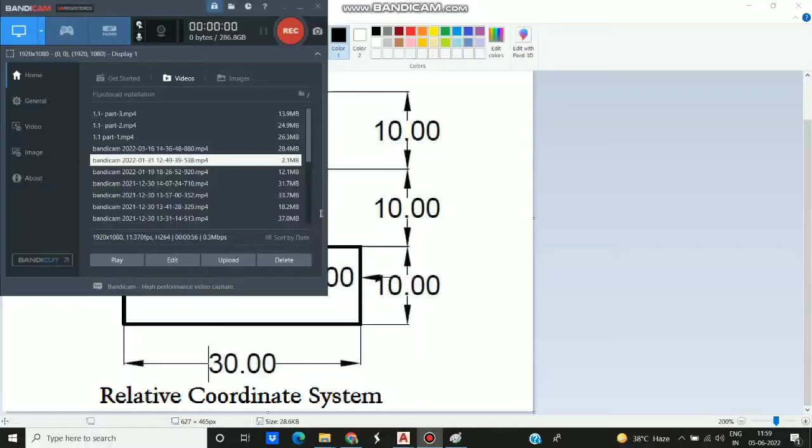Good morning, students. Today we will learn how to use a relative coordinate system. This is the second type of coordinate system. In the previous video we learned how to use the absolute coordinate system.

So what is the difference between the relative coordinate system and absolute coordinate system? In absolute coordinate system we were using absolute value of x and absolute value of y. If there is the y-axis and x-axis, and any point exists here, you take the exact absolute value of x and absolute value of y to show the coordinates. Suppose x is 10, y is also 10 here. Then absolute coordinates will become 10 comma 10.

Now if you want to draw a horizontal line here, this is another corner. Suppose length of this line is 30. So what is the absolute value of x here? It will be 40, absolute value of x.

But if you use relative coordinate system, its relative x coordinate will be plus 30. Plus 30 means the value will be increased by 30. Similarly, if this value is reduced, we will use a minus sign.

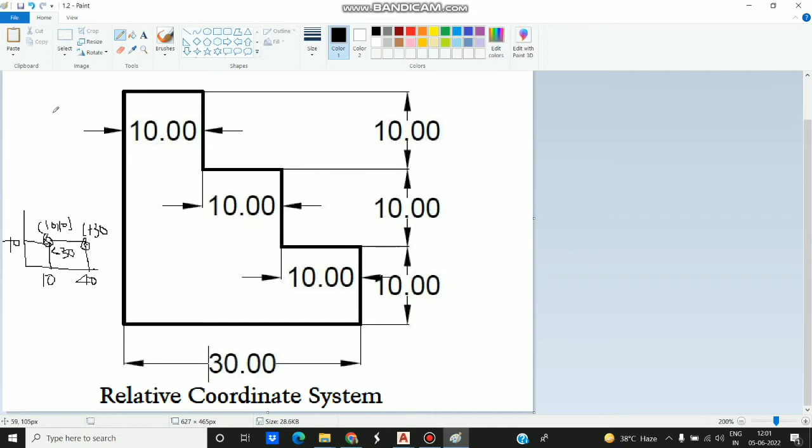So the syntax of the relative coordinate system is: at the rate, plus or minus value of x, comma, plus or minus value of y. This is the syntax of the relative coordinate system.

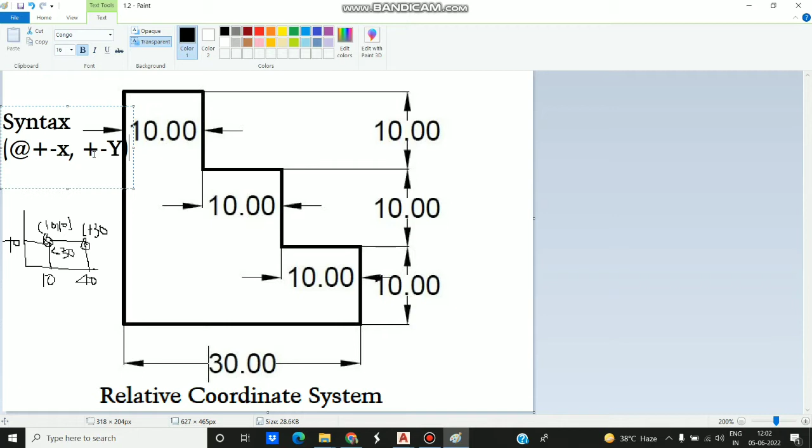At the rate means you will specify the relative coordinate system. Plus means value of x is increasing, minus sign means value of x is decreasing with respect to the previous value. Similarly, plus or minus means the value of y is increasing or decreasing with respect to the previous value. So this is the syntax.

So one by one we will learn how to use this, how to find the coordinates. First of all, we will give naming to all the corners as we have done in the absolute coordinate system.

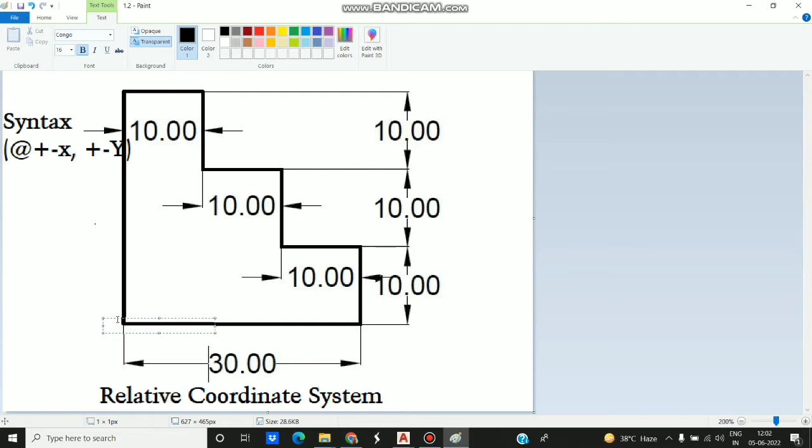If this is A, this is B, this is C, this is D, E, F, G, H, and like this. This is H.

So these are the coordinates. We will find the relative coordinates now. Relative means with respect to the previous value, we will specify all the coordinates. We will start from A.

Similarly, as we have done in the absolute coordinate system, you can assume any coordinates for A, 10 comma 10. I am taking 10 comma 10 for the starting point.

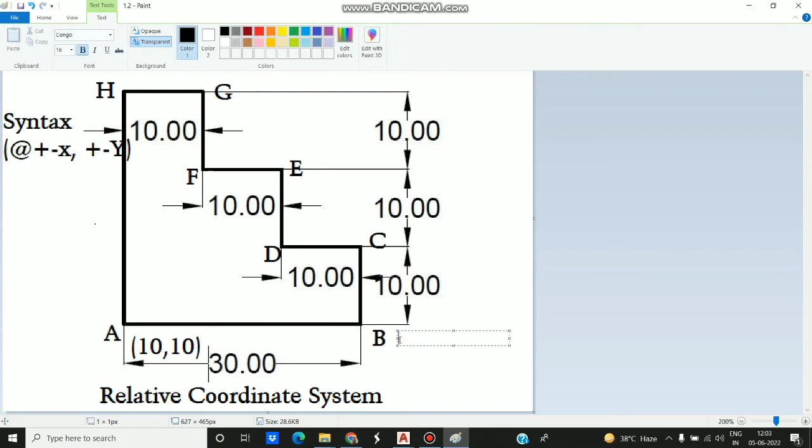For B now, you will change the coordinates using the syntax at the rate plus or minus. Here, is the value of x increasing or decreasing with respect to the previous value? By how much? By 30, so it will be plus 30, comma. Is the value of y increasing or decreasing with respect to the previous value? At corner A the value of y was 10, but at corner B it is again 10, so there is no change. So you will write 0: at the rate plus 30 comma 0. So this will be the coordinates of B.

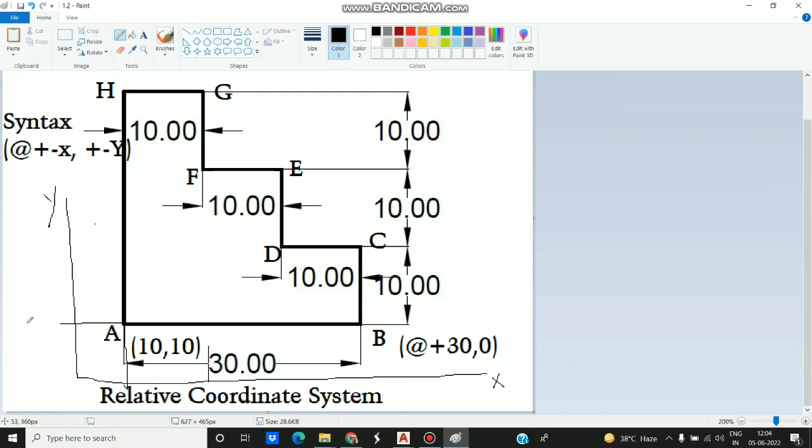If you do not understand how it's increasing or decreasing, you can draw the x-axis and y-axis. Here absolute value of x is 10, absolute value of y is also 10, both are 10. Here absolute value of x is 40 at B, and absolute value of y is 10 at B. So how much did the value of x increase with respect to the previous coordinate? It increased by 30, that's why plus 30 is written here, comma. Value of y remained unchanged, that's why it is written as 0.

Now, what will be the coordinates of C? Value of x remains unchanged, so at the rate 0, comma, value of y is increased by 10, so plus 10 with respect to the previous value. Here it was 0, so now it is increased by 10. So for C, the previous value is B now.

Now we will move to D. Previous value is C. With respect to this, we will check whether the value of x is increasing or decreasing. It is decreasing, by how much? By 10. So at the rate minus 10, comma, value of y remains unchanged, 0.

Now we will come back to E. What is the coordinates of E now?

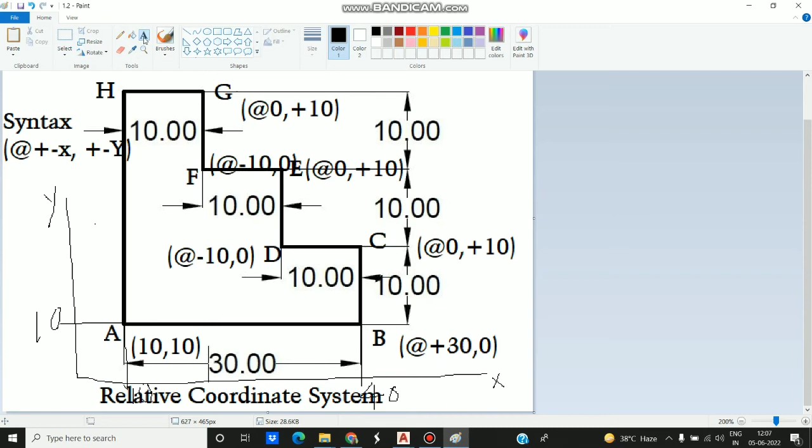Now H, what is the coordinate of H? At the rate minus 10, value of x is decreasing, minus 10, comma, value of y is unchanged, 0. So this is the coordinate of H.

So these are the coordinates: for A, 10 comma 10; for B, at the rate plus 30 comma 0; for C, at the rate 0 comma plus 10; for D, at the rate minus 10 comma 0; for E, at the rate 0 comma plus 10; for F, at the rate minus 10 comma 0; for G, at the rate 0 comma plus 10; for H, at the rate minus 10 comma 0. So this is the coordinates of the given figure.

Now we will draw it on AutoCAD. Let's start.

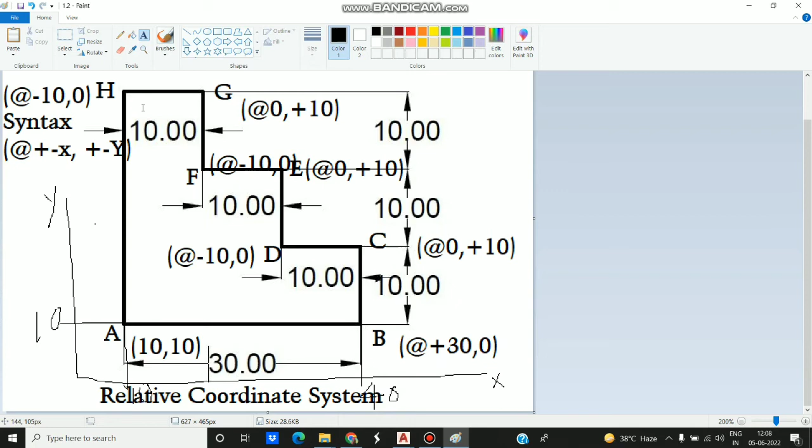Here you can see, turn off all these tools. These are not required, as we have learned in the absolute coordinate system. Now it's not required, it's required later. I will tell you the importance also.

So to draw that figure, first of all we need a draw command, and that draw command is the line command. Type L, enter, specify the first point. First point was A, which we have chosen, 10 comma 10, enter. Now I got my starting point. Now give one by one all the coordinates.

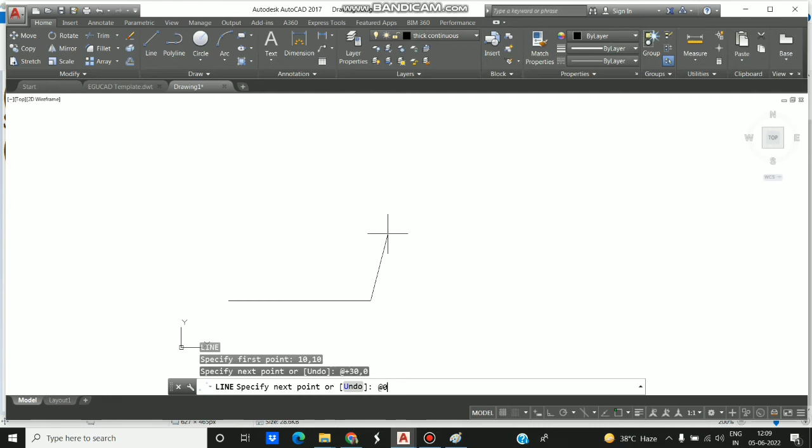At the rate plus 30, comma 0. You will see, find this figure here. Now specify the next point, means C, at the rate 0 comma plus 10. Next D, at the rate minus 10 comma 0, enter.

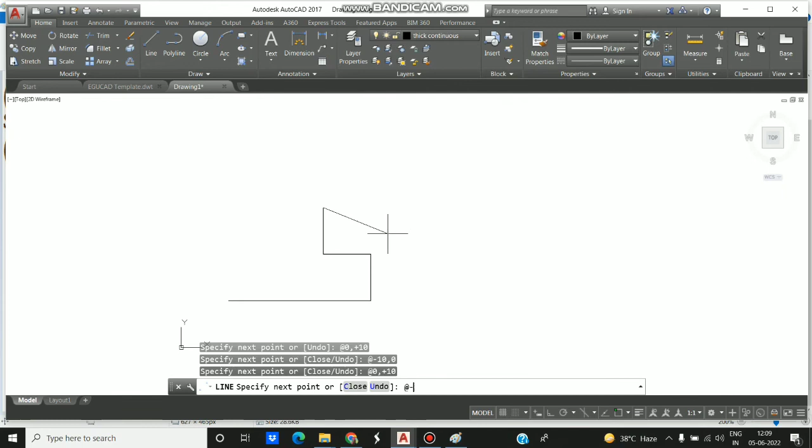Next, at the rate 0 comma plus 10. Next, at the rate minus 10 comma 0. Next point, at the rate 0 comma plus 10. Next point, at the rate minus 10 comma 0, enter. Now still you can see we have given all the coordinates.

Still this line diagram is incomplete. So how to complete this? By drawing this line. How to draw this line? Simply you can give this initial starting point, 10 comma 10, to complete this figure, and you can see our figure is completed.

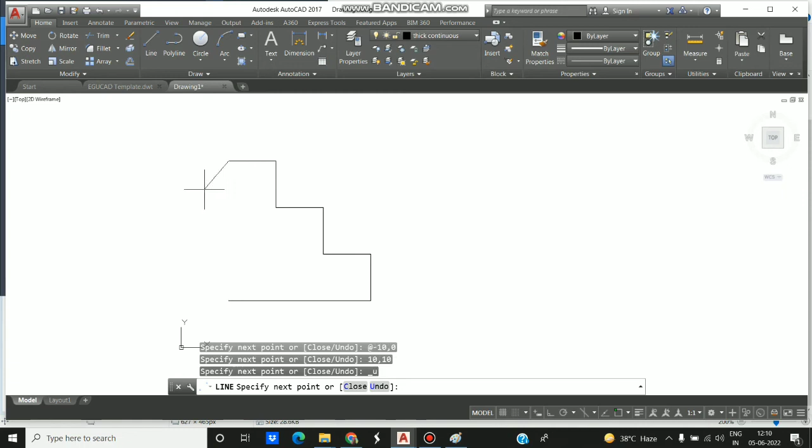Or you can use a relative coordinate system like at the rate 0 comma minus 30, like this, to complete this figure. At the rate 0 comma minus 30. Still this line command is working. So to leave any command, press the escape key of your keyboard. ESC is written on the top left corner, so use this escape key, right?

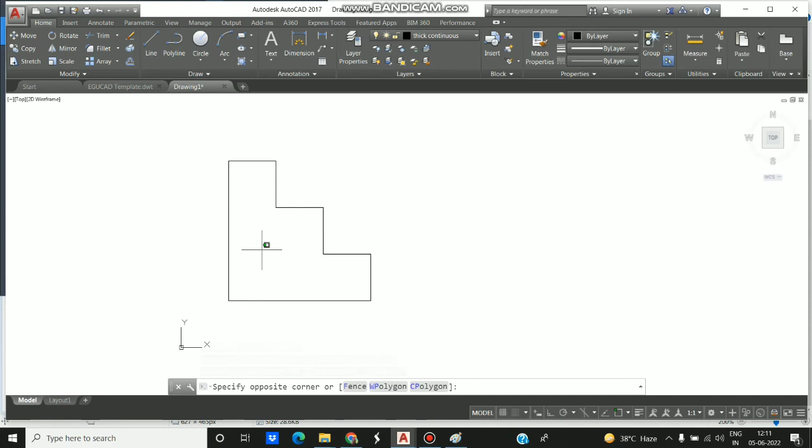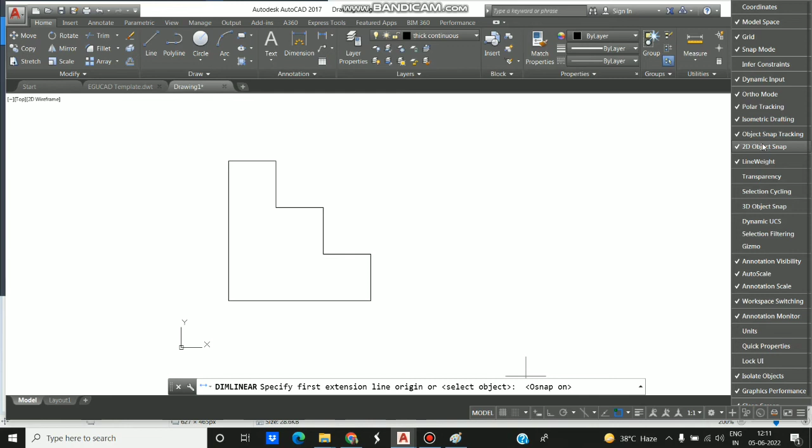So now this is the time to show the dimensions. So to show the dimension, this tool should be on, as we have learned in the absolute coordinate system. Turn this tool on, this is object snap. If this tool is not appearing on the status bar, click on this customization and search here in this list. There will be 2D object snap here, right? So this tool should be on.

So here this is to show the dimension annotation. Click on the linear to show the straight dimensions, and show all these dimensions like this.

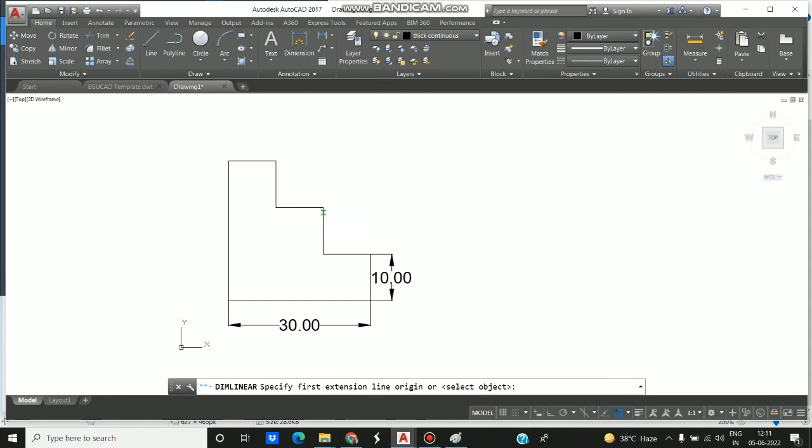Okay, so this is the way. One click here, second click here, go downward, left click, one click here, second click here, and one click here, second click here, show here dimensions. Simple, this way you can show all the dimensions, right?

Still there is a confusion about what are the actual lines or what are the dimensional lines. So what we will do, simply we will increase or decrease the thickness.

So this is the line weight tool. Turn this tool on. If this tool is not appearing on the status bar, go to customization and find here line weight. There should be a tick in front of this line weight tool, only then it will appear on the status bar, right?

After turning on this tool, select the lines which are part of the figure. Simply left click on those lines which are part of the figure.

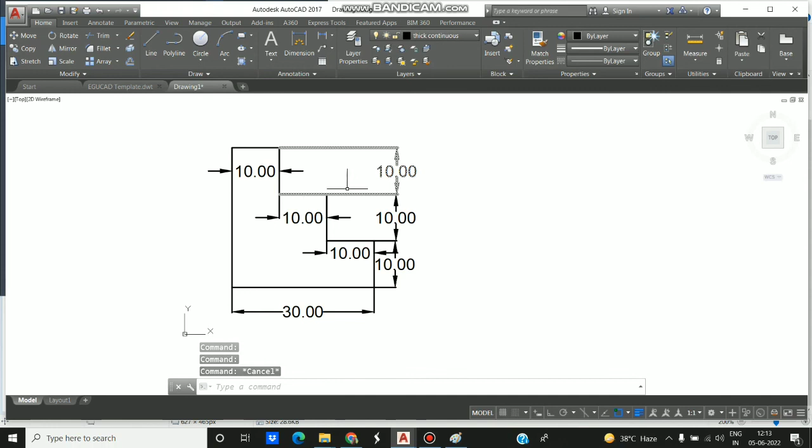I will delete this line because it is creating confusion, I will draw it later. Similarly here, this way I have to delete these lines because they are creating confusion. I will show this dimension again.

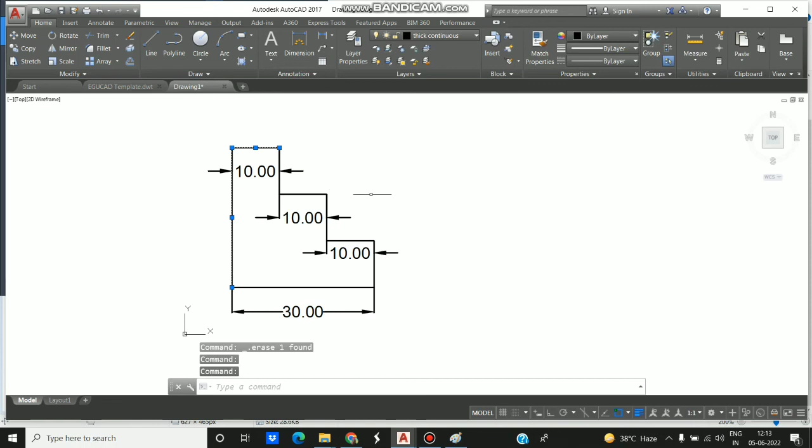So select these lines which are part of the figure, and go to this ByLayer to increase the thickness to 0.80. Now you can show those dimensions which we have deleted, and show these dimensions.

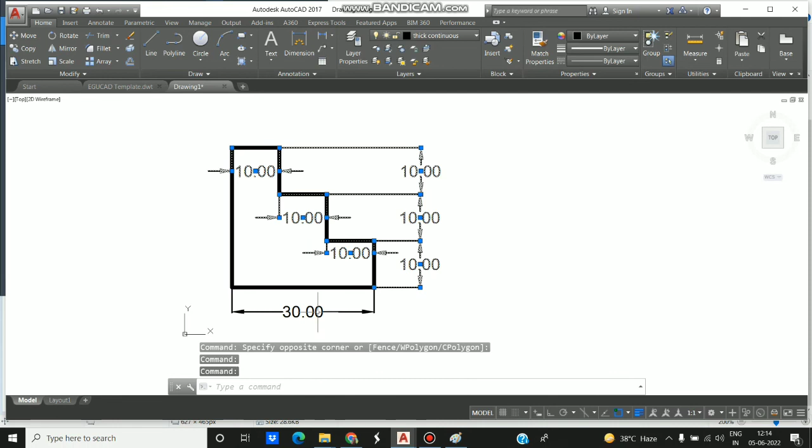And select them, left click to select them. If you are unable to select them, press the shift key. Now go to this ByLayer, 0.05, change the thickness to 0.05. Your figure is completed. Now I hope all of you know how to convert this into a PDF. This is the practice of the relative coordinate system, right?